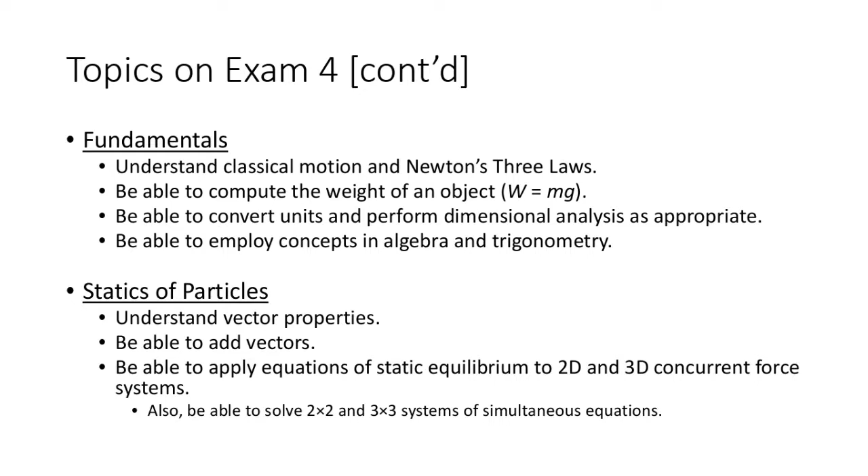Rigid body systems and rigid body equilibrium, this was exam 2. So this is being able to compute cross products and dot products. If exam 1 was all about adding and subtracting vectors, exam 2 is all about multiplying vectors. Remember, there are 2 ways of doing that: there's a scalar product where the multiple of 2 vectors is a number, a scalar, and then there's a vector product where the multiple of two vectors is another vector. So the cross product is the vector product, the dot product is the scalar product.

And then the cross product R cross F is the moment. That was the formal definition of a moment, R cross F. The numerical magnitude is just the magnitude of that force, and then the term D, which is the moment arm, the perpendicular distance from the force to the point in question. That's how we compute moment about a point.

If we dot that moment with lambda, a unit vector about a given axis, that will tell us the moments about that arbitrary axis. So if you wanted to find moments in 2D, you could dot that with a k vector or whatnot, and there's your moments in 2D.

Make sure that you can resolve force couples - remember, a force couple is two forces of equal magnitude, opposite direction, separated by a distance. You can convert that into just a single moment, and you can generate equivalent force systems in 2 dimensions and 3 dimensions, where you have a rigid body with a bunch of forces on it, and you resolve it into just a single force and a single moment, or a single force a certain distance away from a given point.

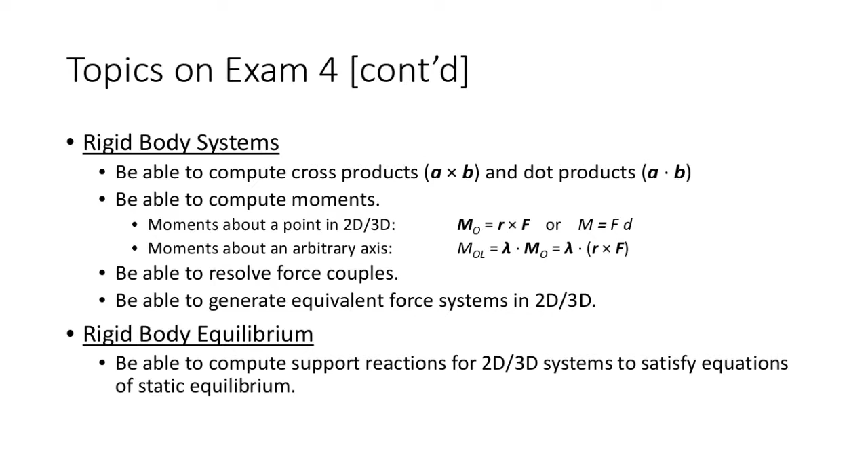Exam 3 was centroids and structural analysis. For centroids, make sure you can determine the location of the centroid of a line, an area, or a volume. And for the moment of inertia topic, make sure that you can handle that if necessary.

For structural analysis, really the two stars of the show were trusses. Make sure that you can determine the internal forces in a truss, either with the method of joints or the method of sections, whichever makes sense, and that you can draw the shear and moment diagrams. I put reactions on here because you need to be able to compute support reactions in order to determine those internal forces, but it's not really a separate topic from rigid body equilibrium.

The only thing really new on this list is friction. You're going to have at least either a conceptual question or a computational problem on friction. I know friction is the newest topic and hasn't been on a test before, so it will be on this test - I'll just go ahead and tell you that. But it's not the be-all, end-all star of the show; there's plenty of other stuff to discuss.

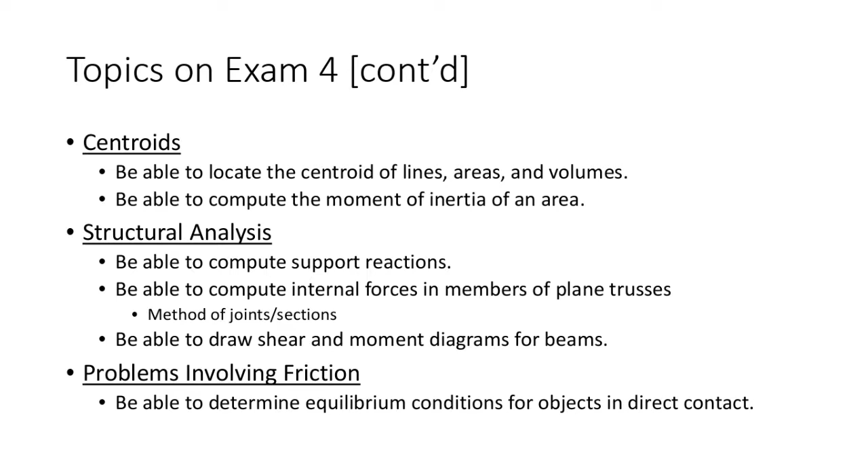The last thing I wanted to show you are the references. What I basically did is compile all of the meat and potatoes, if you will, of the course - everything that I think is a critical slide. So you can think of each of the lectures as music albums, and this is the greatest hits.

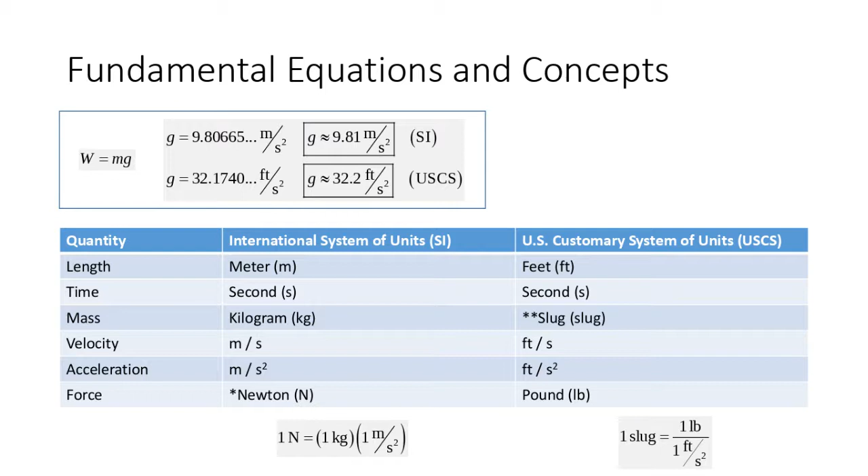First off, we've got the fundamental equations and concepts - gravity, the weight of an object is mass times gravity - and all of the fundamental equations and concepts we've assessed throughout the semester. The big thing is that you understand the base units, so masses in kilograms, forces in newtons. And what is a newton? It's a kilogram times a meter per second squared. Make sure that you have an understanding of that.

Trig - let me say one thing about trig. You obviously need to be able to manipulate trig functions and compute relationships between rectangular and polar. That stuff is important for the course, no way is that not an important topic. The one thing I'd point out about trig, which I mentioned during the last exam review, is that you should think about when you need to break out the trig functions and when you don't.

There were some times during exam problems where you're given a slope ratio and you think, okay, I need to compute the angle by taking the inverse tangent and then take the sine and cosine of that angle to get the x and y components. But you can just use SOHCAHTOA - the adjacent over hypotenuse and the opposite over hypotenuse - and it would be a lot faster. So while it's important, make sure you're being as efficient as possible, because you want to make it easier on yourself, not harder.

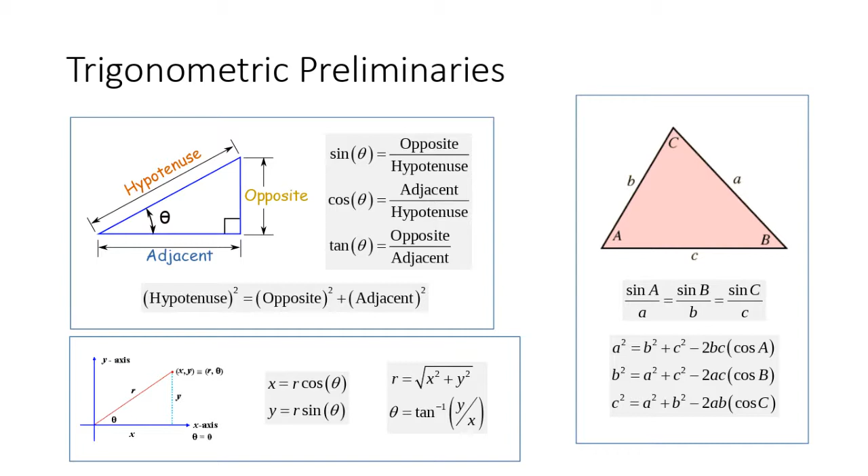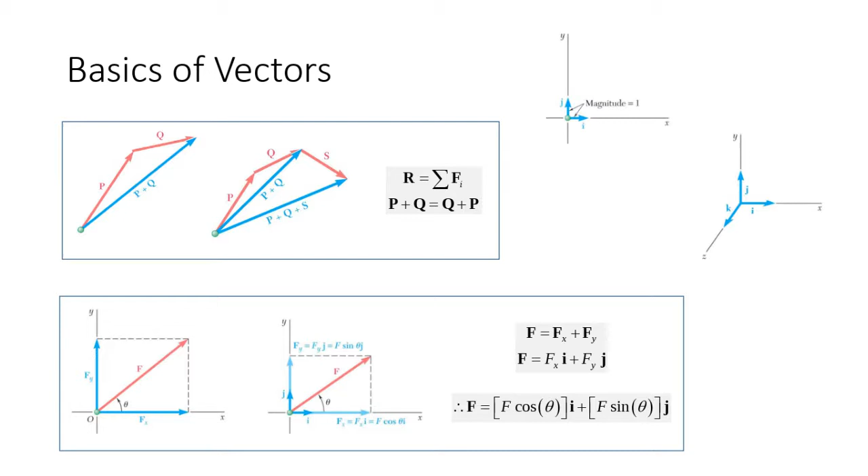Vectors - make sure you understand how to add vectors, and the idea of the tip-to-tail rule associated with vector addition. So P plus Q can be found by taking P and Q, stacking them tip to tail, and then striking that line between them. You can also take a vector, split it up into X and Y components, and then add up those separate X and Y components. We expressed vectors in X and Y components using IJK vector notation - remember, IJK are just unit vectors along the X, Y, and Z axes respectively, a convenient way of writing vectors in 2 and 3 dimensions.

Oh my goodness, I am a popular guy.

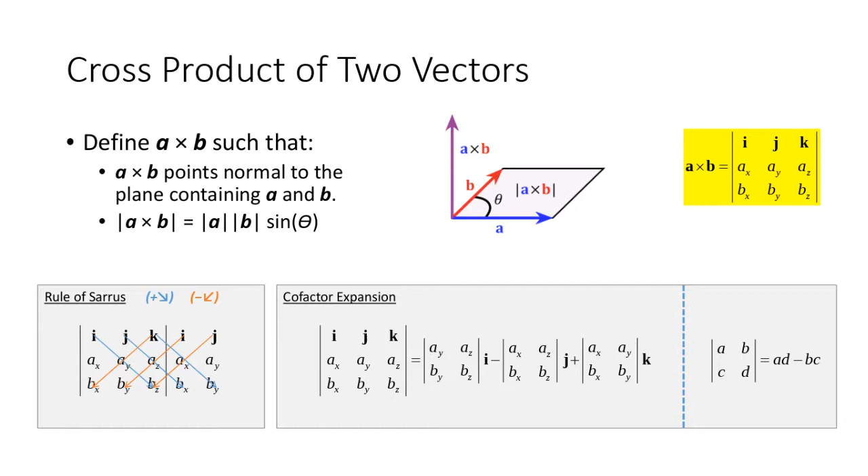Next, we go to exam 2 land. So we've got cross products and dot products. Remember the cross product, there's a couple of ways to do that. You could do the Sarrus rule, or you could do cofactor expansion. But remember the concept as well. If I have vector A and vector B, what is the cross product A cross B? That vector points normal to the plane containing A and B, and then the magnitude of that vector is the area of the parallelogram formed by those two vectors.

If the cross product is related to the sine of that angle, the dot product is related to the cosine of that angle, and it generates a scalar magnitude, not another vector, but a constant multiple.

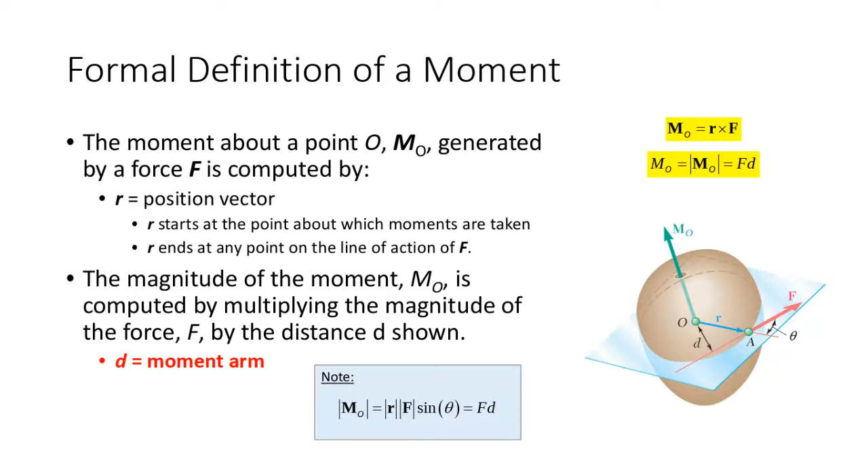Then our formal definition of a moment. Formal definition of a moment is R cross F. R is the position vector. It starts at the point about which moments are taken, and it ends at any point along the line of action of F. And then the magnitude of the moment is basically just the magnitude of the force times the moment arm. So yeah, I think we sort of hit that into the ground.

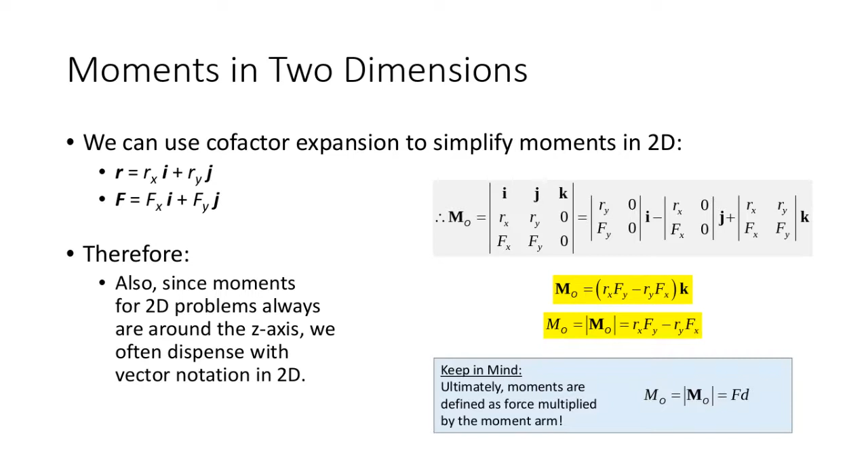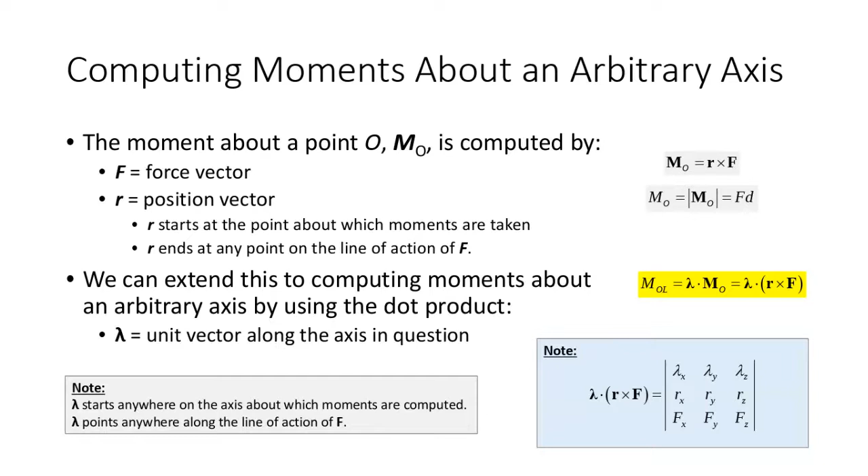Moments in 2 dimensions. So if we're looking at a moment, let's say for a vector in the XY plane, then our moment by definition is going to spin about the Z axis. So a lot of times all we really care about is the magnitude, and we can compute that very easily. And then moments about an arbitrary axis, we take R cross F and we dot it with the unit vector along that axis. R starts anywhere on the axis about which moments are computed, and it points anywhere along the line of action of F.

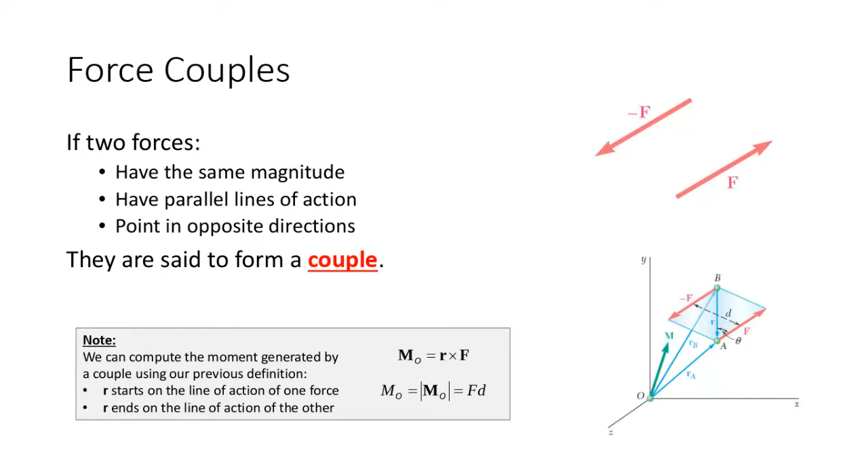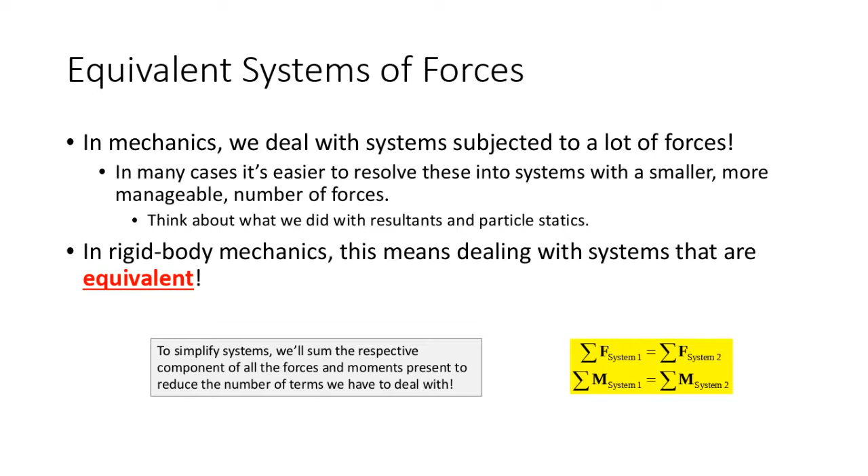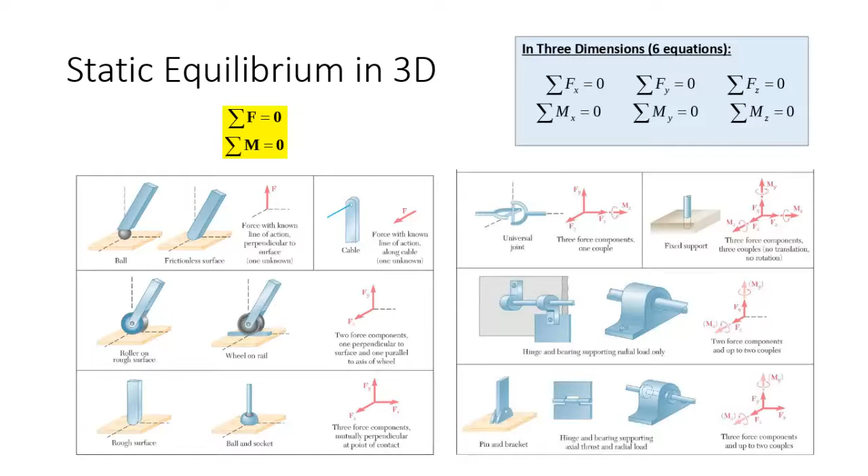Force couples, again, we can take those 2 vectors and replace them with just a single moment. That's the magnitude of one of those forces times the distance between them. And there's the definition of a force couple. Equivalent systems of forces, that's when we take the rigid body that has a bunch of different forces on it and resolve it into just a single force and a single moment. And I think we did a fair job of covering that. Here's just some of the reactions and support conditions in 2 dimensions and in 3 dimensions.

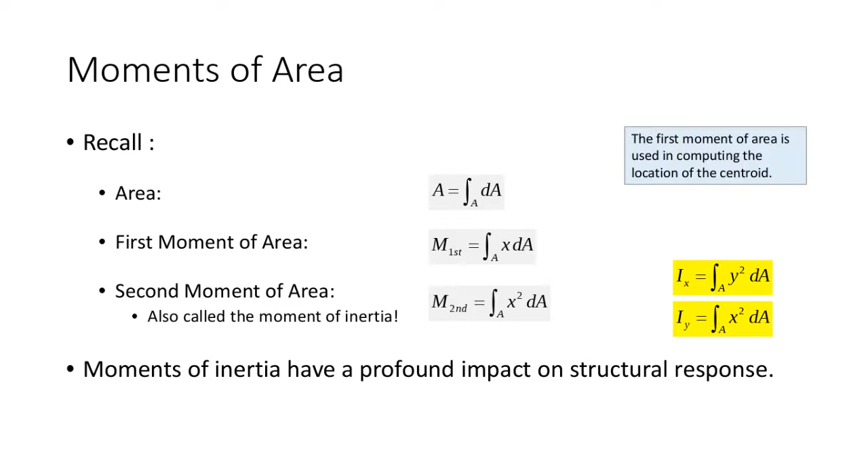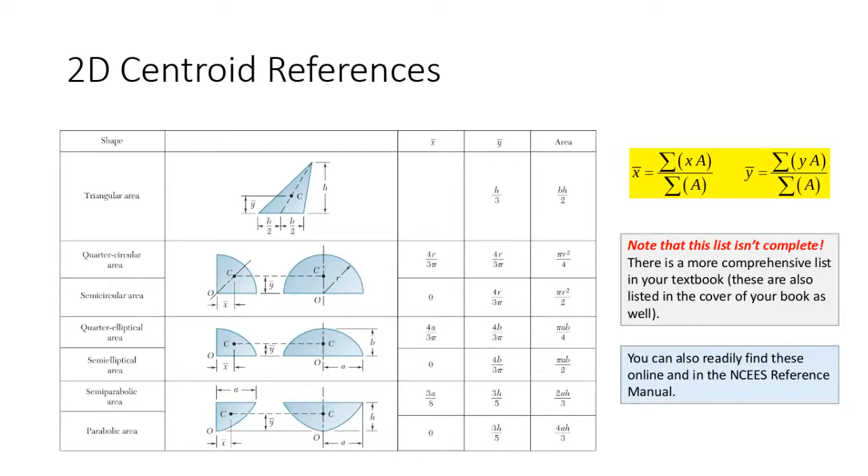And then we get into exam 3 land. We're in moments of area. So this is how we started to develop the expressions for the centroid. The first moment of area, the second moment of area. The second moment of area is called the moment of inertia. And don't forget, it's really a good idea on the exam to have your centroid references handy, both your 2D centroid references and your 3D centroid references.

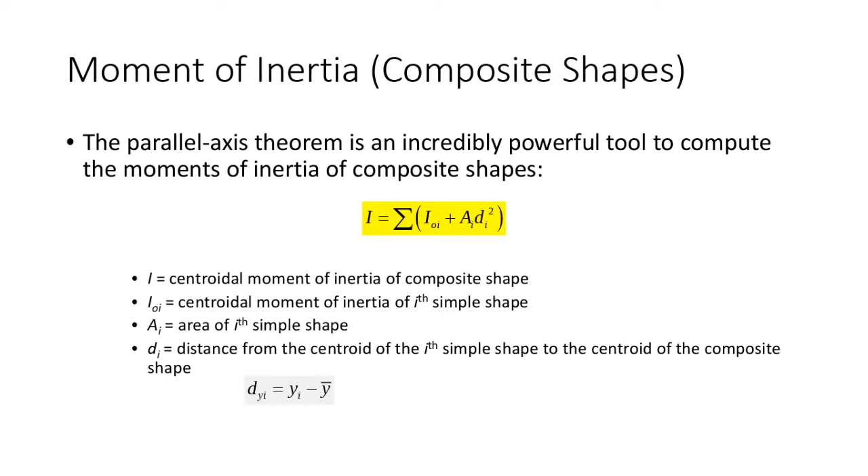I also went ahead and threw in the formula for the moment of inertia, the parallel axis theorem. Remember, D is the one term that's a little unique, and that's the distance from the centroid of each individual shape to the centroid of the whole composite shape. And then we have our references for the moments of inertia as well.

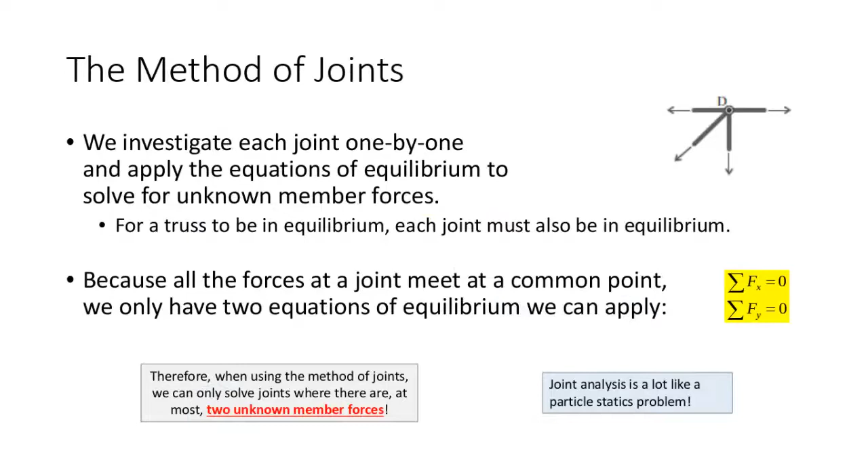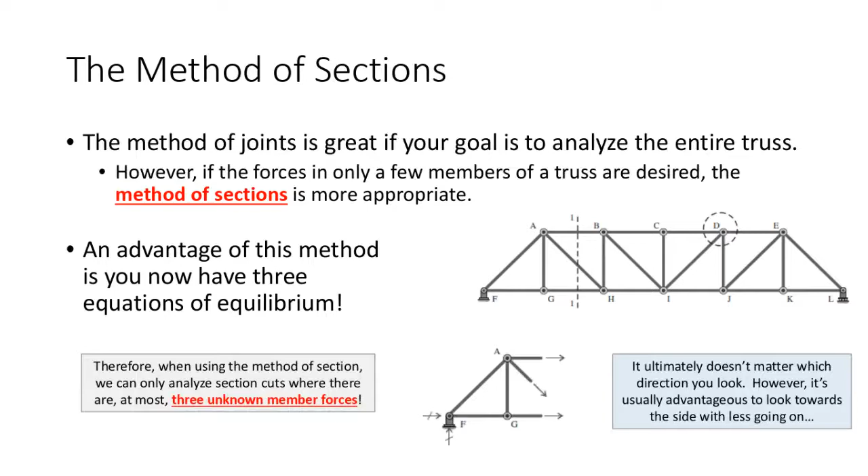Method of joints and method of sections, the 2 approaches for solving a truss. Remember, method of joints is a bit more appropriate for solving the whole truss. Method of sections is a bit more appropriate for solving a particular member in a truss. I know the one on the exam that we had was just a small truss, so it really didn't matter.

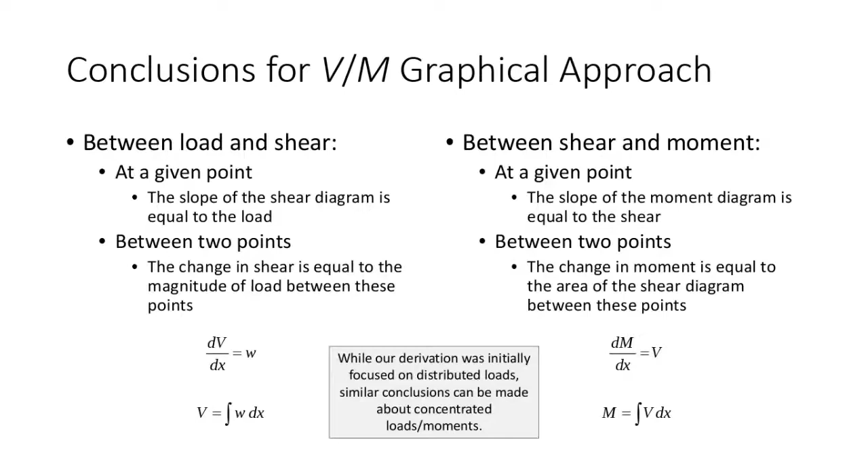Our derived relationship between load, shears, and moments led to the conclusions for our graphical approach, which was really where the money was. And then this was our shear and moment diagram relationship that we developed for concentrated loads, as well as the one for distributed loads. And then really the only new slide, well, I guess you have seen it because we did it on Monday. It's just a single slide with everything related to static and kinetic friction.

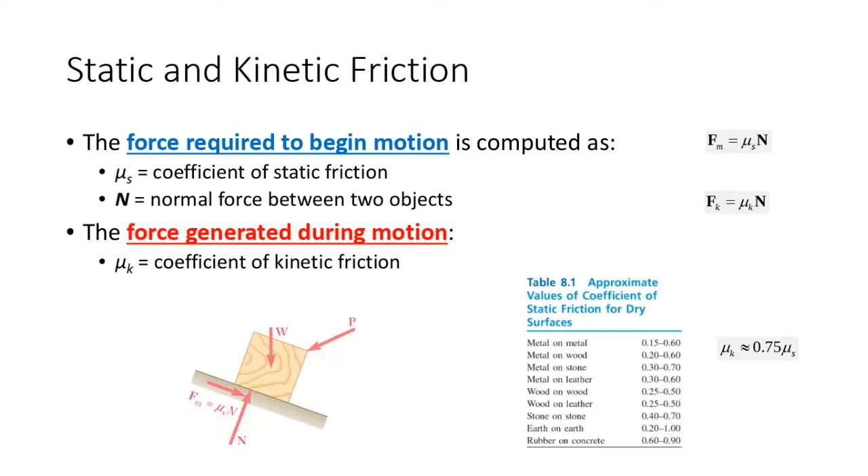Whew. We have covered a lot in this class. We've done our share of work. Man, I need a second. All right. That is not just the material on the exam, but that's the class. That's statics. We've covered a fair amount.

So we have 30 minutes. We don't. Yeah, I know what you mean. We've got a fair amount of time, and I don't want to waste the time. Also keep in mind we have all of lecture on Friday to address any questions you might have. But I want to open it up to see if there's any questions about anything, about the exam, about anything we've discussed, what have you.

And there was a lot there. I know. I went through 36 slides of just formulas and equations. So I'm sure it's probably like, I got to take that in and process it a bit. And that's why I wanted to give you the time to process that between now and Friday, so that on Friday we can start to dig into it a bit. But floor is yours if there's any questions. I want to make sure that you have your say. So floor is yours.

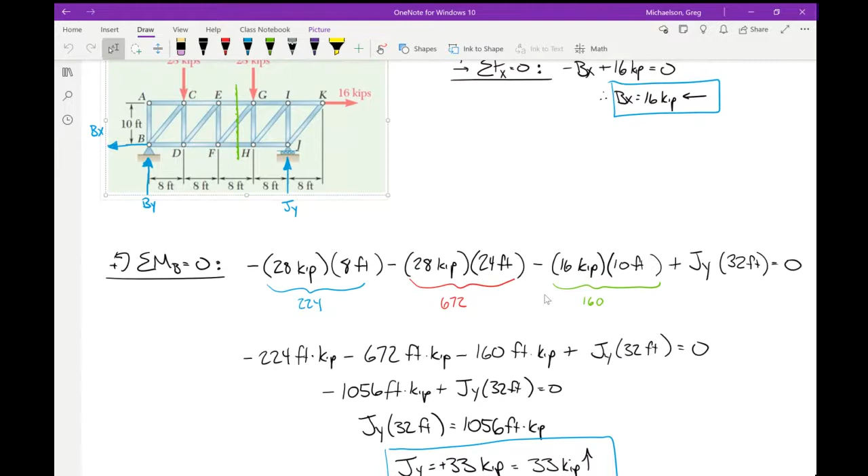So the first thing we did was we computed the support reactions, and we got that BX was 16 kips to the left. We got that JY was 33 kips up, and BY was 23 kips up. All right, so is everybody good on the support reactions? If we want to do a discussion of support reactions later, I'm more than happy to, but is everybody okay if I just move past that? Okay.

So we cut a section, and I chose to look to the left. With this problem, I don't know that it really mattered whether I looked to the left or to the right. I do tend to believe philosophically that you should cut a section and look towards the direction that has the least stuff going on. Make the problem easier for you as the engineer to analyze. But for this, either way you still got 3 forces to deal with, so it really didn't matter.

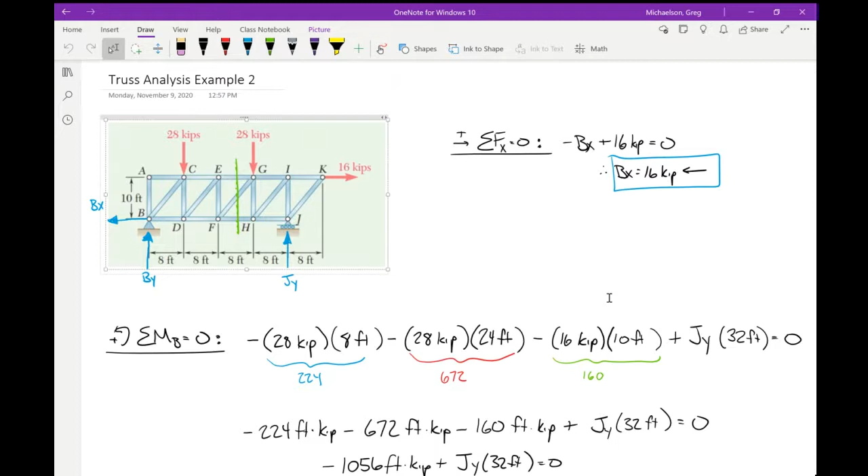So I cut a section and looked to the left. And when you cut a section and look to the left, this is what you've got. So there were 3 moments. Let me erase some stuff because there's some highlights here that don't really matter all that much.

Okay, erase this, erase that, erase this. Okay, so that way we're kind of looking at something from a frame of reference here. Okay, so here's the problem, and maybe I'll label one other thing. So we'll call this FFGY, FFGX.

Okay, so here would be what you would see as the student or as the analyst before you begin summing forces and summing moments. So I cut a section, I look to the left, and I have the 16 kip reaction, the 23 kip reaction, and then the 28 kip load, the 3 loads in red over to the left. Those are what we found by equilibrium of the structure and what was already on the structure. The unknowns are the internal forces in the 3 members, the EG, the FG, and the FH.

So from a strategy perspective, we took the diagonal and we split it up into X and Y components. So how many unknown horizontal components are there? There's 1, 2, 3, right? But in terms of vertical components, there's only 1, right? So the first thing that I did when solving this problem is I said, let's just sum forces in the Y direction. So by summing forces in the y direction, I got FGY, and then the slope ratio gave me FGX.

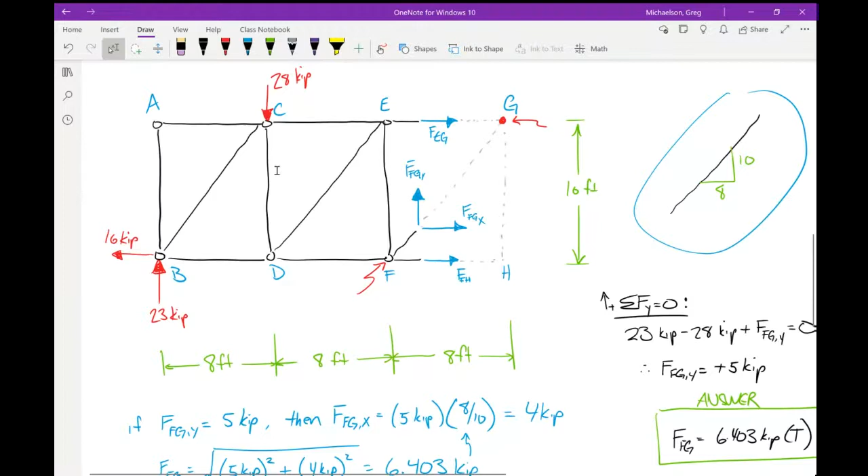be solving for FH. Likewise, I could sum moments at F, and that would eliminate that diagonal and that horizontal member at the bottom, and that would isolate EG, and I could solve for EG. So the short answer to your question is, always sum moments at a location where the unknowns intersect. Did that answer your question? Good, good. And I think on this problem, we summed moments at F to isolate the EG. That's what we did up here.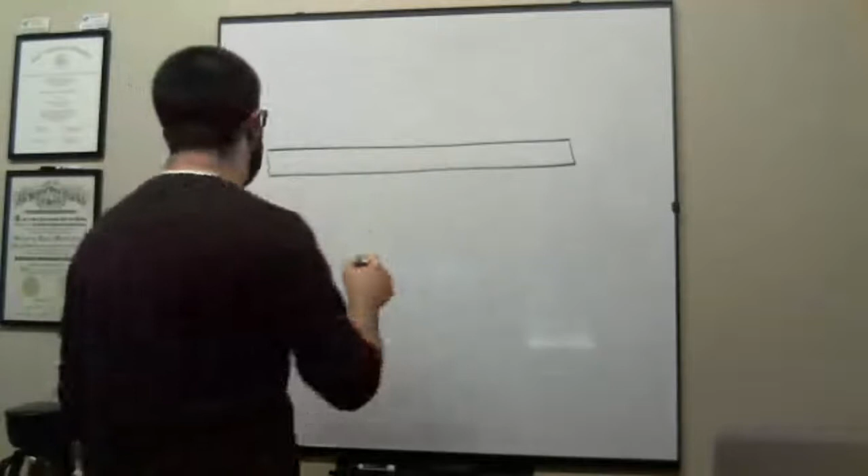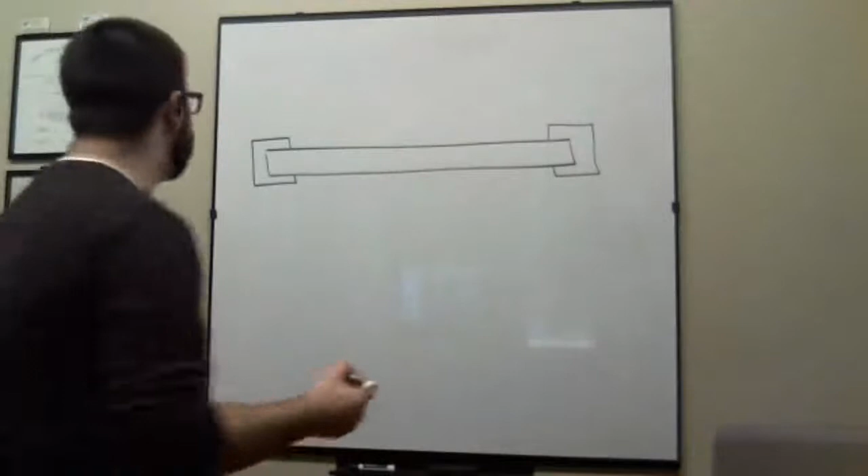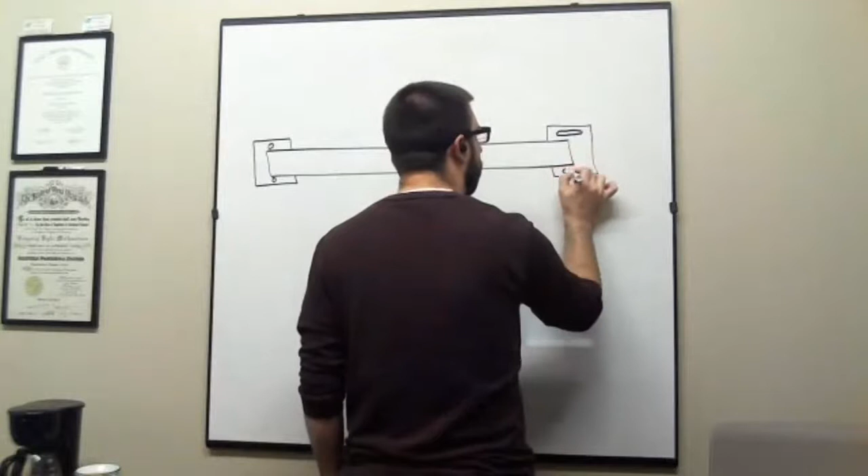So let's just take a look at a beam. So this is a beam in plan view, okay? I'm in the helicopter looking down, so this would be a beam that's supporting a bridge. So there's a base plate element right here that the beam sits on, and a base plate element here that the beam sits on. And so one of the things I mean by fixed bearing and expansion bearing is on one side, you might use holes to bolt that down, but on the other side, you might have slotted holes. So it actually is allowed to move a little bit. We actually do allow that to happen.

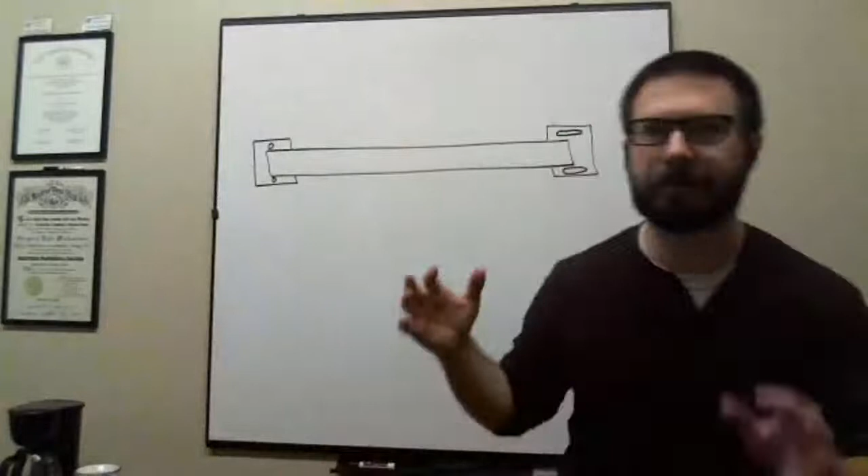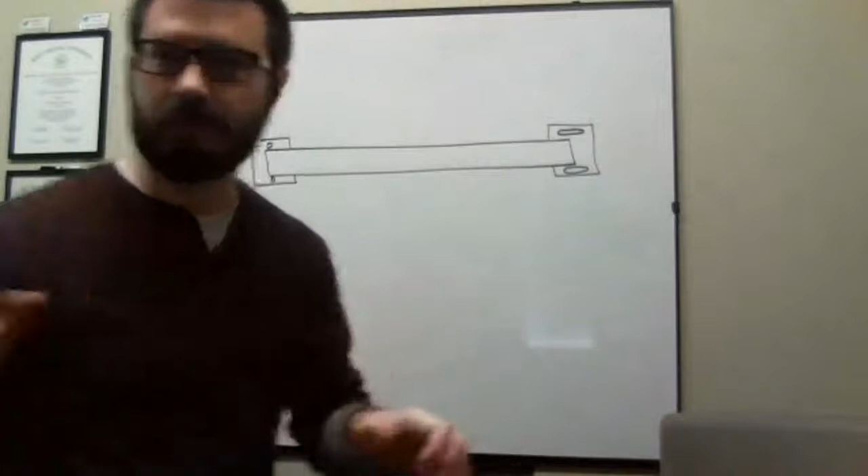Yeah, and so that's actually a really good question. Now, here's another thing that's worth pointing out. Now you got me going off on tangents here. So let me show you something. This is a steel design aspect for you. So if we're talking about beams in a building, the facts are the beams really aren't going to be seeing much load left or right. They're really only going to be loaded up and down. The beams that are supporting the weight of this office are really only seeing vertical loads. In building design, the only time you ever experience lateral load is with two things, either wind or earthquakes. So for most gravity loads, it just goes up and down.

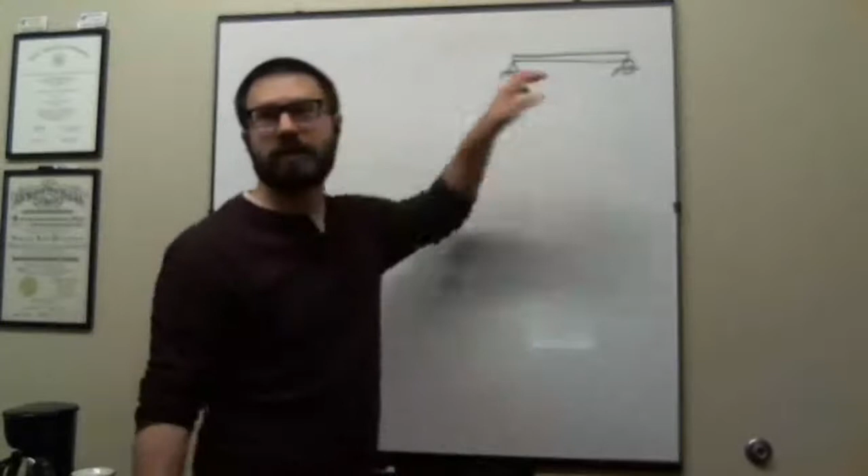And so one of the things that we do to handle this is the way that we connect steel beams. So do you remember me using the term simply supported? Do you remember me using that? So okay, I might not have actually used the term here, but a simply supported beam is just one that has... I'm going to talk about that here in a second, but short answer is kind of yeah. So this is what's called a simply supported beam. It just has a roller support on one end and a pin support on another. It's a very common analysis model that we use in civil engineering.

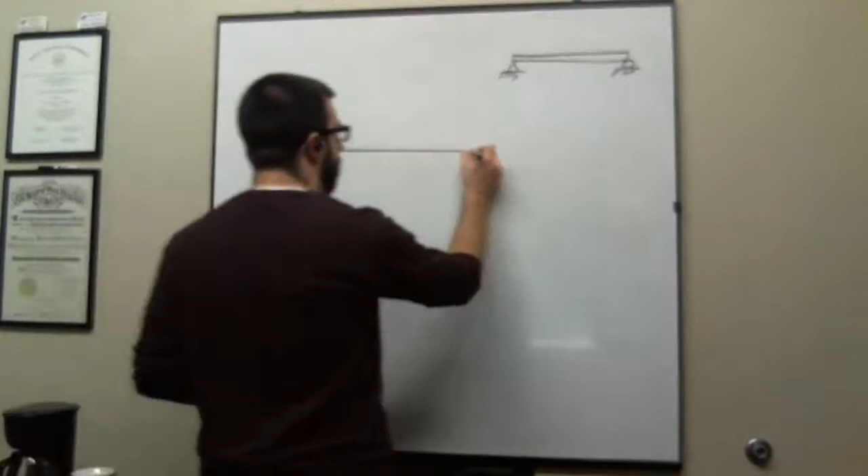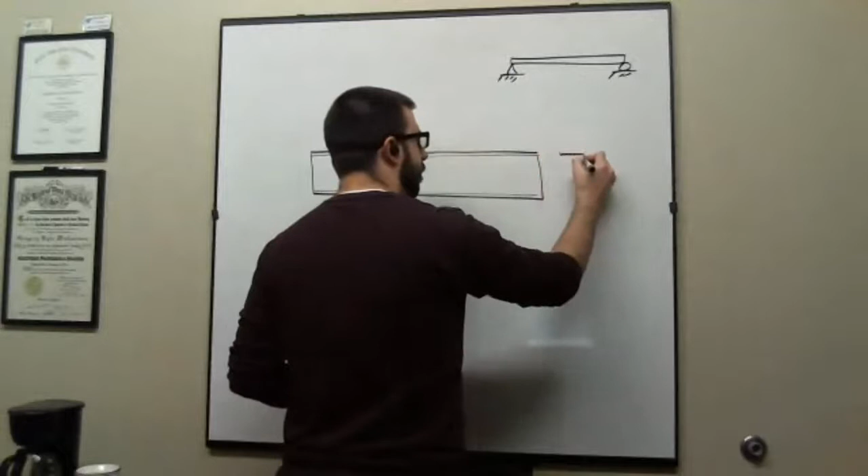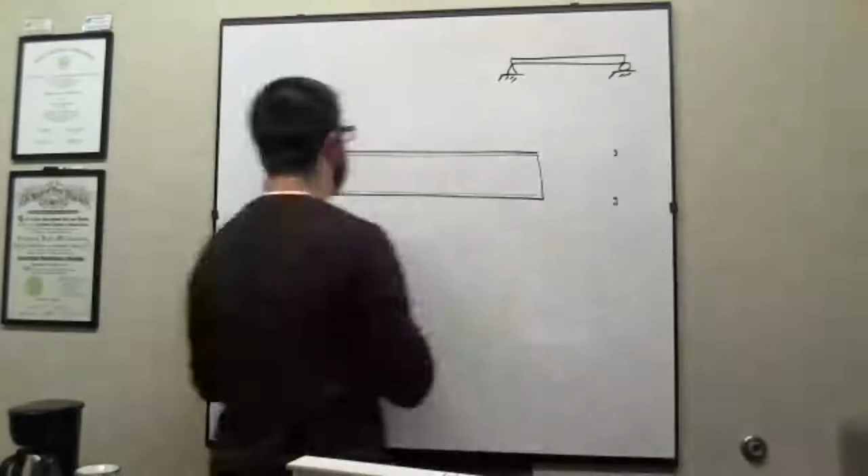And the way that we would build this in real life is, let's say you have an I-beam, okay? So here's the beam, and then here's the flanges, right? So hold on. If you looked at the beam on the end, here's the I-beam, but if you looked at it on the side, you would see the flanges and then just the main body of the web. So that's kind of what I'm looking at here. Simply supported beams, when you connect them to the column over here, so let's say here's a column.

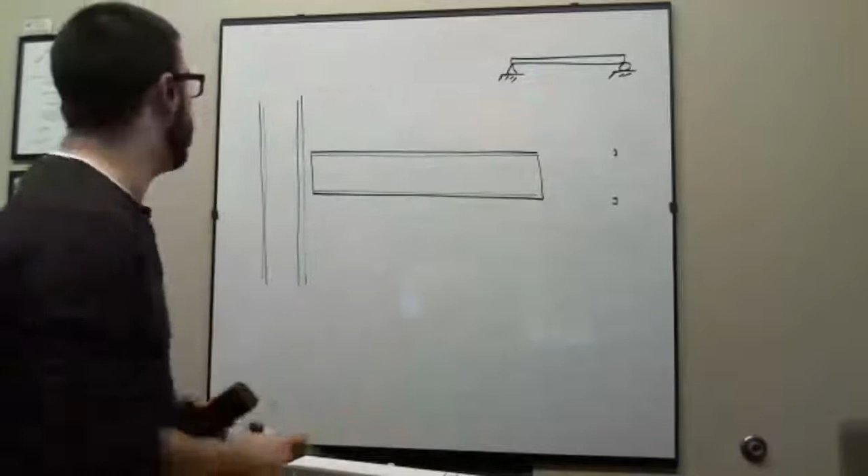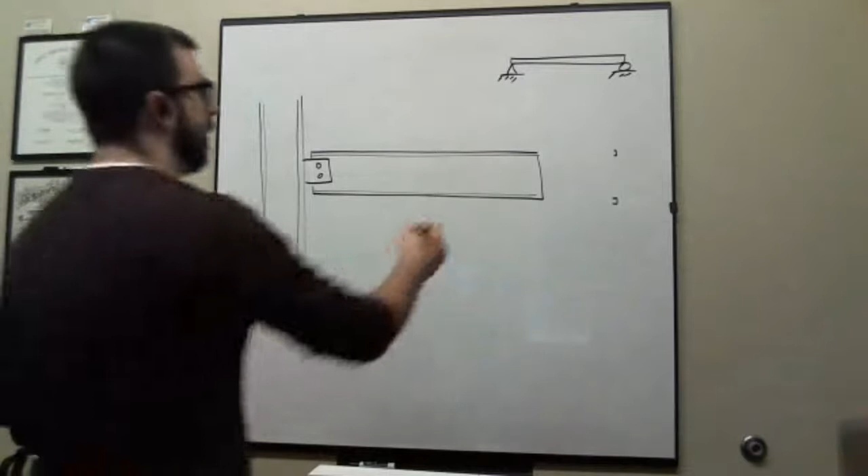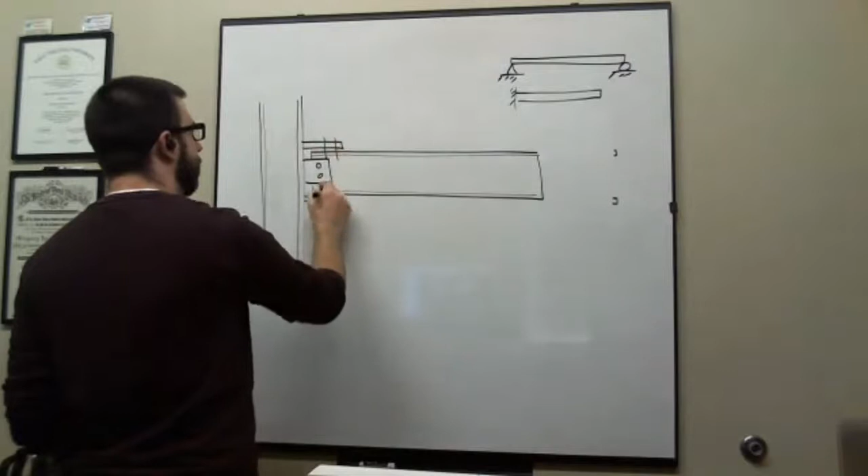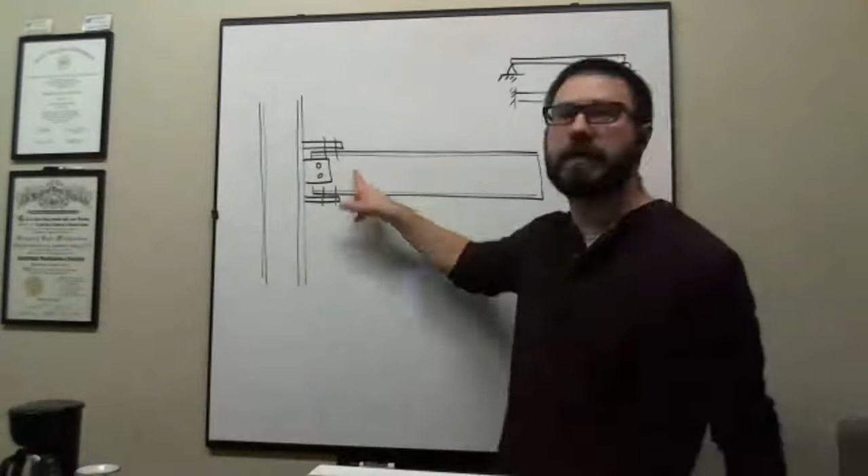So if you wanted to connect this and you wanted it to be simply supported, you would only connect the webs. So here's the beam, and if you connect it just with the web, we treat that as simply supported. But if you wanted it to be a fixed connection, like a cantilever, then not only would you connect the web, but you would connect the flanges as well. The idea is that the flanges are really what carry the moment, but the web is what carries the shear and the reaction.

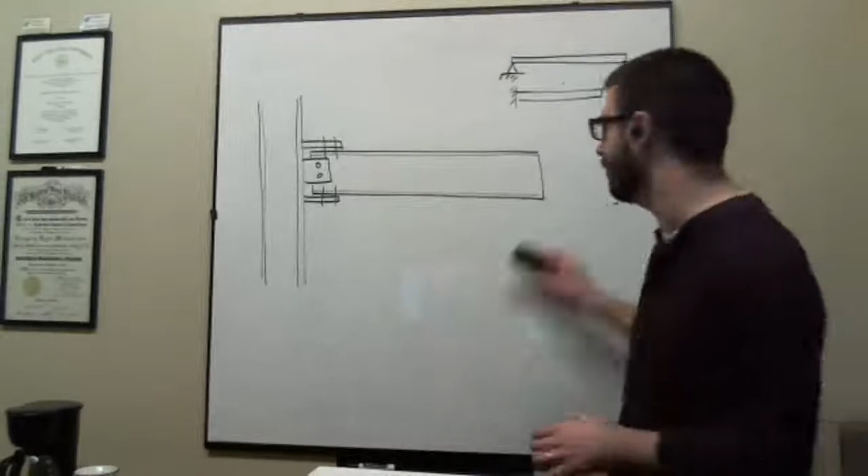So we only do this in very specific locations in the building, basically the places where we're trying to make sure that the building can withstand wind and seismic. Otherwise, we just use simple connections. Sorry, I went off on a tangent there.

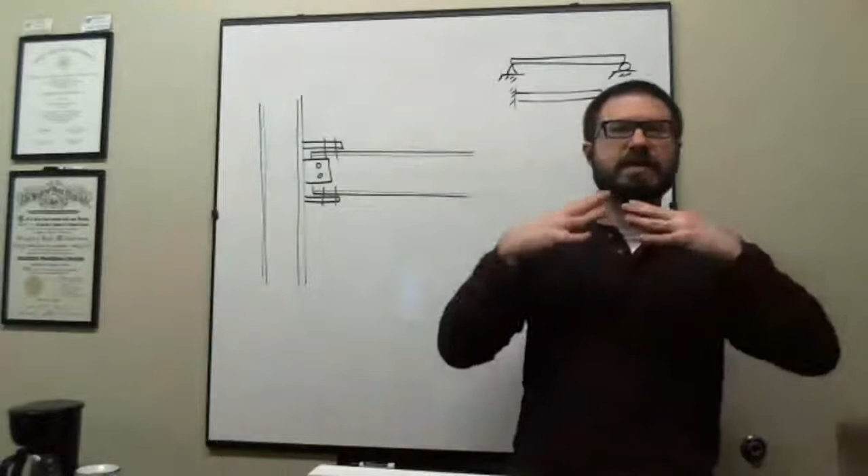So those are called expansion joints, and that's exactly what you're talking about. That's what they're designed to do, expand and contract. They tend to be a real problem from a maintenance standpoint because structurally they behave exactly the way you want, but then they get a bunch of gunk inside them, and when you get gunk inside them, they don't expand and contract the way you want. You get leaves and rocks and all that stuff, so they have to be cleaned out pretty regularly. It's a challenge from a maintenance standpoint.

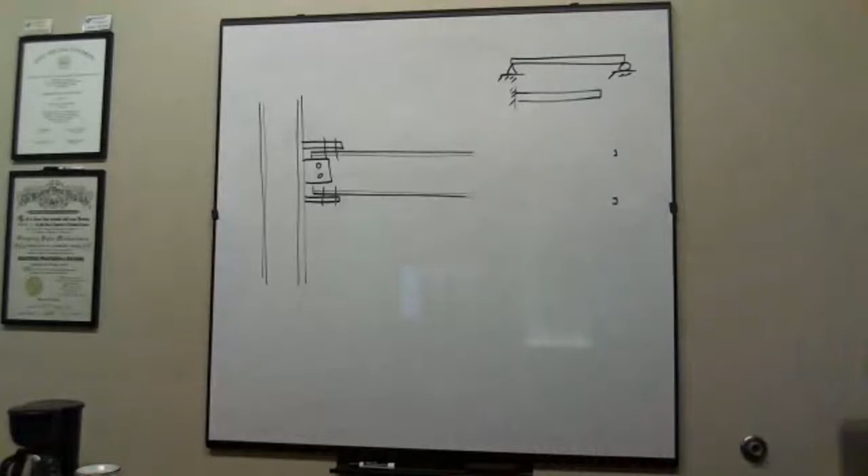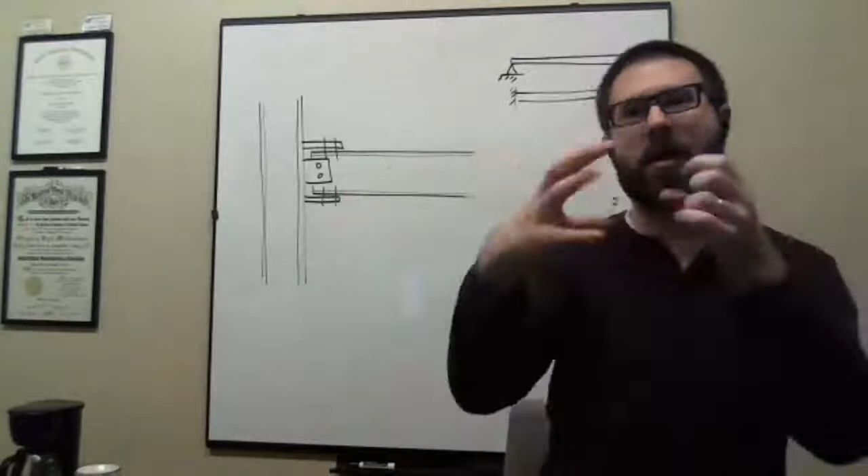The current state of the art is to try and use what are called integral abutments, where you cast all of that together in one big slab to try and eliminate that joint. A lot of new bridges use integral abutments, so in newer construction we try to avoid using those joints whenever possible. You've got to be real careful how you detail your abutments and bearings, but yeah, we try to avoid it.

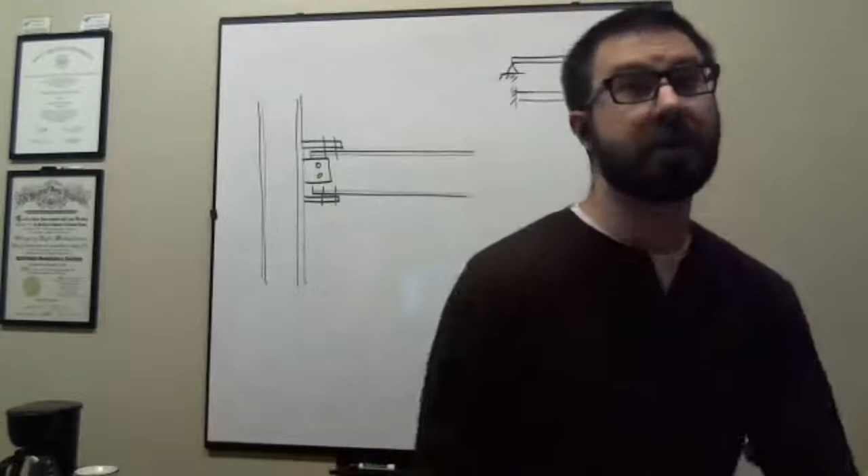It is a maintenance challenge. Man, I'm going off on bridge topics. I could talk about this stuff all day. I want to make sure I'm answering statics questions too.

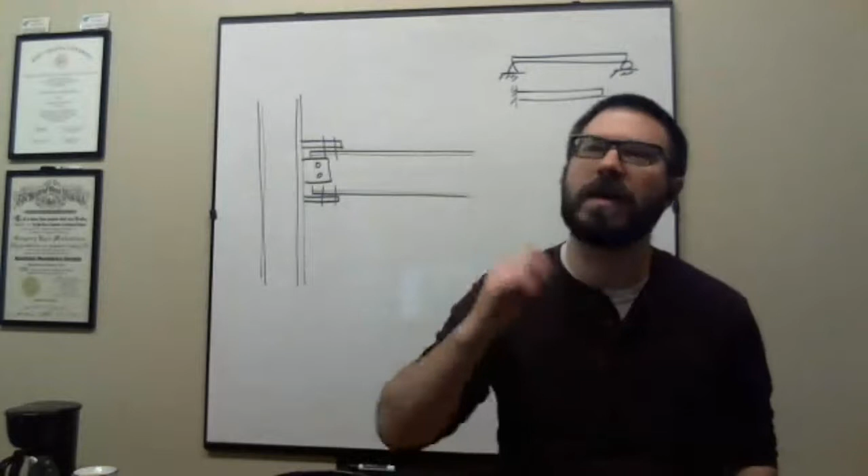Well, but keep in mind, think of a bridge on I-64 that's got 4,000 vehicles a day, and we design bridges in the United States for 75 years. So that thin material over 75 years of traffic, you know what I mean? The thin layer issue.

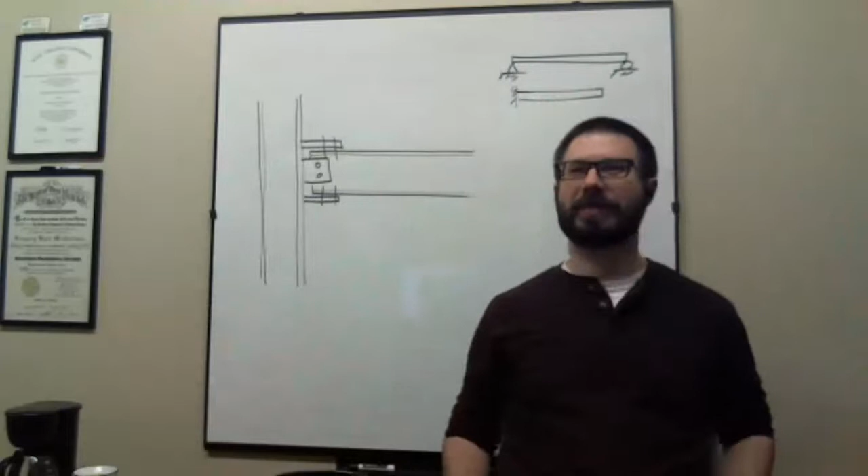Well, come on over. We're happy to have you. Now you gotta find your passion and go for it. Well, now hold on. I don't know that I would call the civils the Sith or anything, you know.